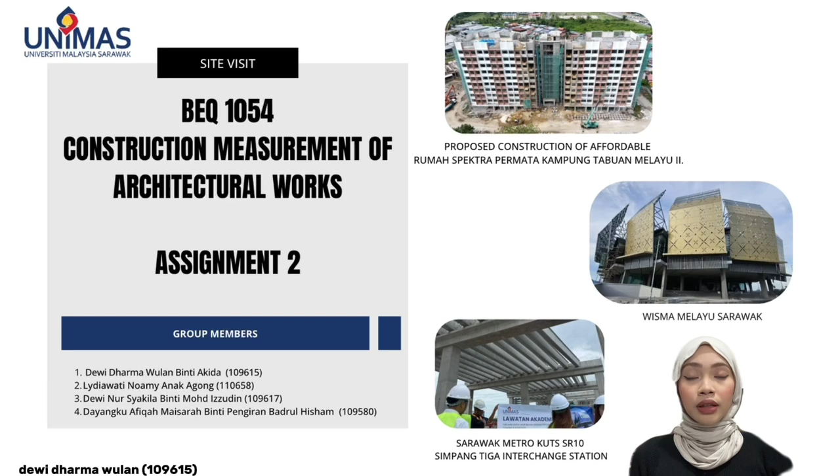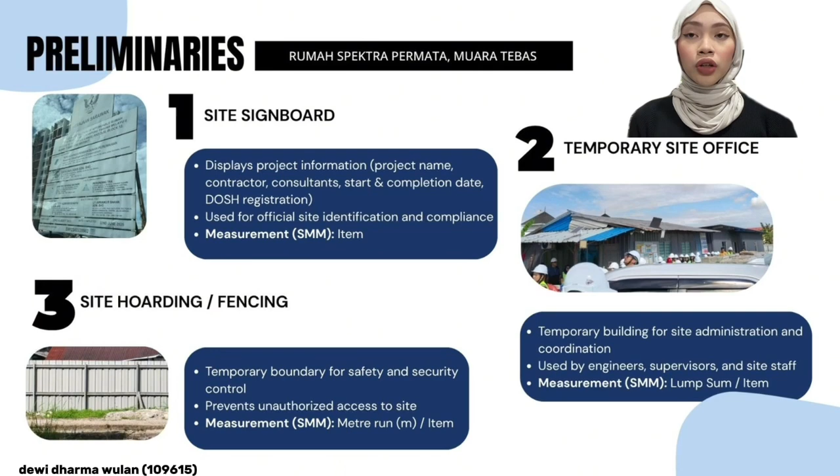To begin with, for preliminaries, we observed temporary works at the Rumah Spektra Permata site. First of all, the site signboard is measured as an item because it is a complete installation. Furthermore, the temporary site office is measured as a lump sum as it includes provision, installation, and maintenance throughout the project duration. Besides that, site hoarding made of zinc fencing is measured in meter run along the boundary. Next, scaffolding is measured in square meters or as an item, depending on its specifications. Lastly, the debris chute is measured as an item as it is a complete waste disposal system.

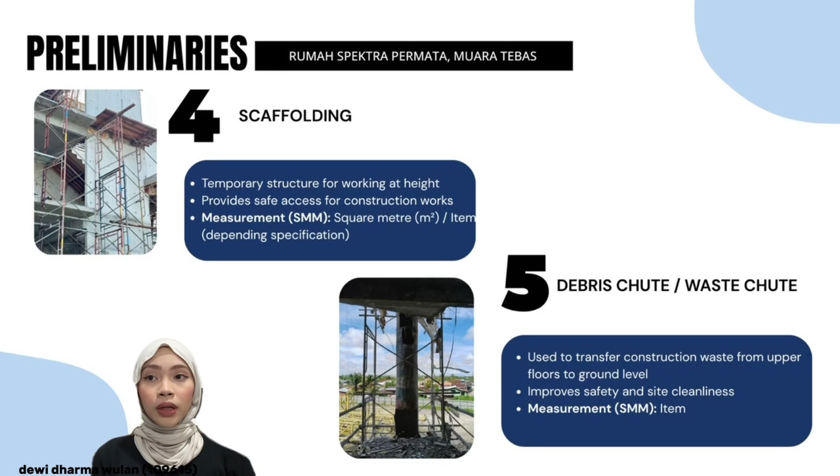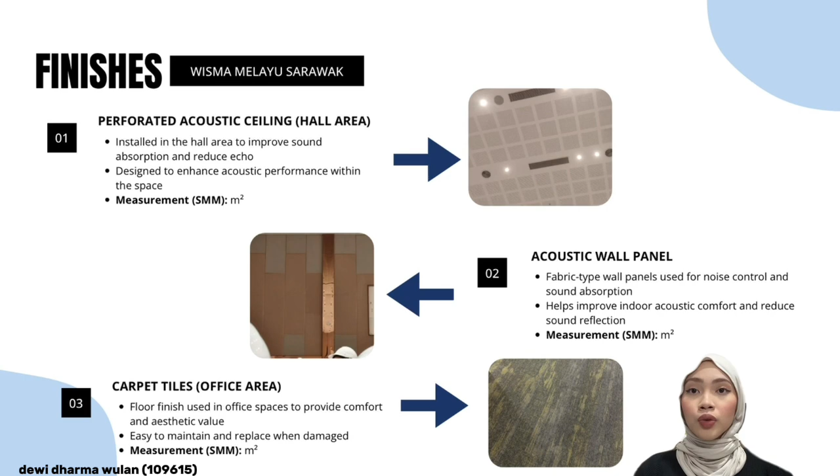Moving to the finishes, we observed several elements at Wisma Melayu Sarawak. Firstly, a perforated acoustic ceiling was installed in the hall area for sound absorption and acoustic improvement. Furthermore, acoustic wall panels made of fabric material were used for noise control and sound absorption, and they are measured in square meters. Besides that, carpet tiles were used as floor finishes in the office area and are measured in square meters. In addition, marble-look porcelain tiles were installed at the entrance for aesthetic and durability purposes and are also measured in square meters.

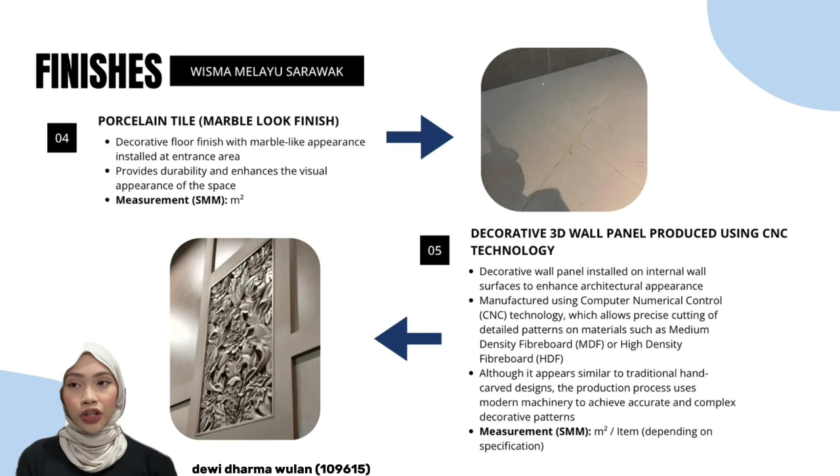Lastly, decorative 3D wall panels using CNC technology were installed on walls and are measured in square meters or as an item depending on specifications. These finishes clearly show the use of different materials for both functional and aesthetic purposes in building design. Thank you.

About types of fittings in mechanical and electrical. The first photo is a linear slot diffuser, which is an air distribution fitting used in HVAC systems, installed at ceiling level to supply conditioned air evenly. It provides uniform airflow and thermal comfort and is measured in meters. Next is the square ceiling diffuser, which is a typical four-way diffuser for uniform air distribution, installed on suspended ceiling systems and commonly used in office and commercial buildings, and measured in number. The third one is a recessed LED downlight, which is a lighting fitting installed flush with the ceiling surface. It provides general illumination for interior spaces and is suitable for offices, corridors, and commercial areas, measured in number.

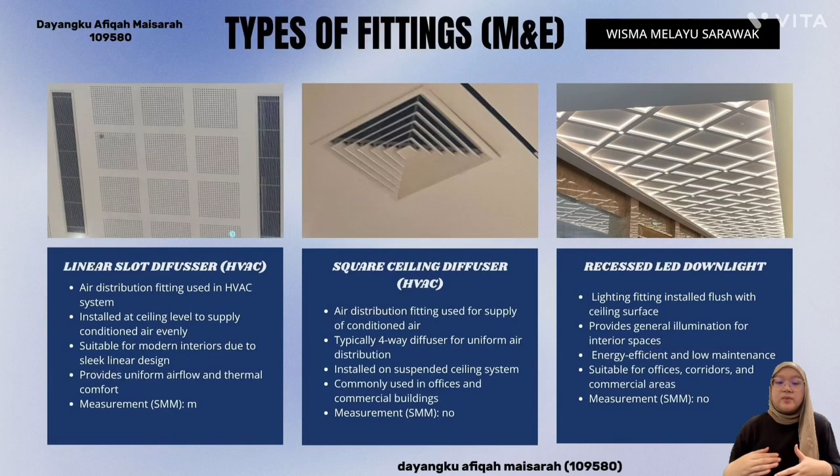Next is a round diffuser, which is a circular air outlet used in HVAC systems. It distributes conditioned air evenly in all directions, installed on the ceiling for effective air circulation and common in commercial and institutional buildings. It is measured by number. The last photo is electrical conduit, which is protective piping used to house electrical wiring. It is installed concealed within the ceiling or wall. The electrical conduit helps protect cables from damage and improves safety. It is measured in meters.

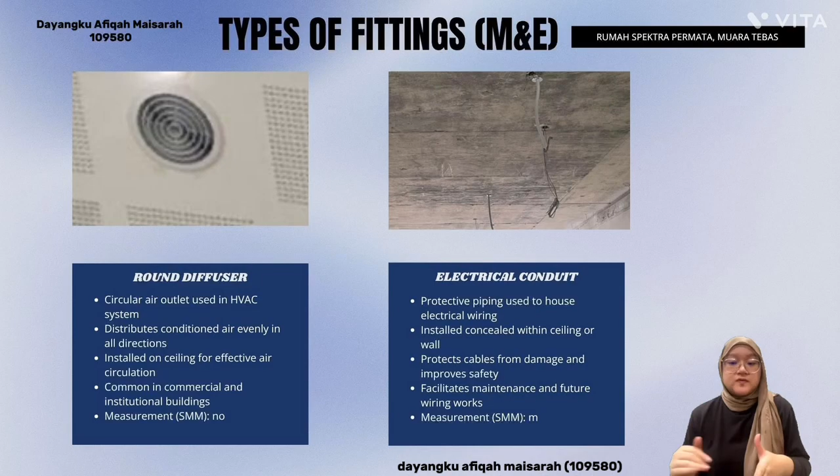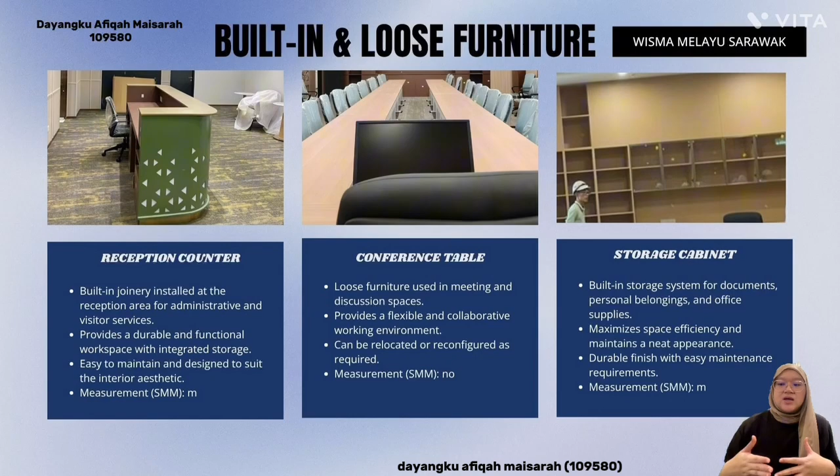Now I'll talk about built-in and loose furniture at Wisma Melayu Sarawak. The first photo is a reception counter, which is built-in joinery installed at the reception area for administrative and visitor service. It is easy to maintain, designed to suit the interior aesthetic, and measured in meters. Second is the conference table, which is loose furniture used in meeting and discussion spaces, which provides a flexible and collaborative working environment, can be relocated and reconfigured as required, and is measured in number. The third photo is a storage cabinet, which is a built-in storage system for documents, personal belongings, and office supplies, which maximizes space efficiency and maintains a neat appearance. It has a durable finish with easy maintenance requirements, measured in meters.

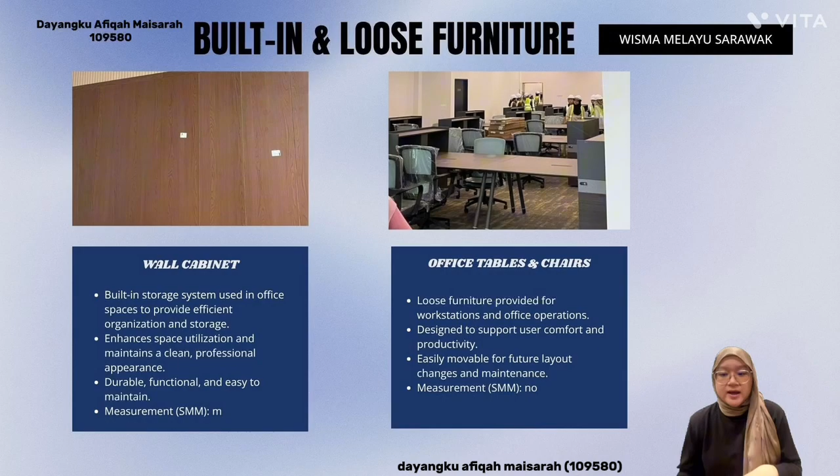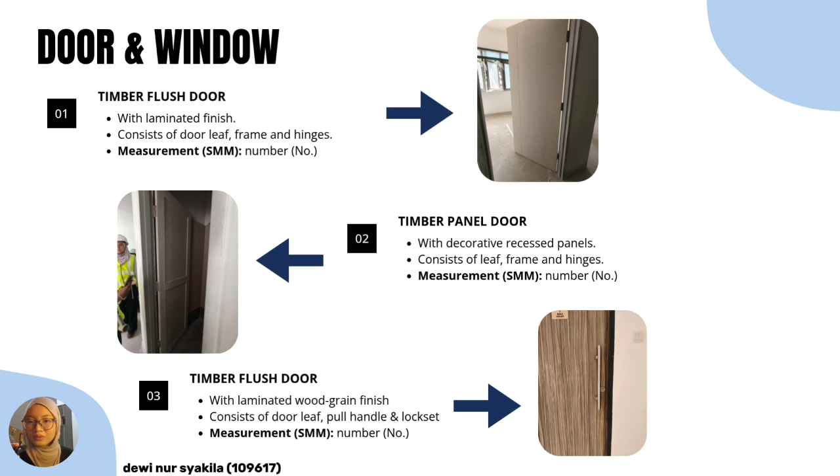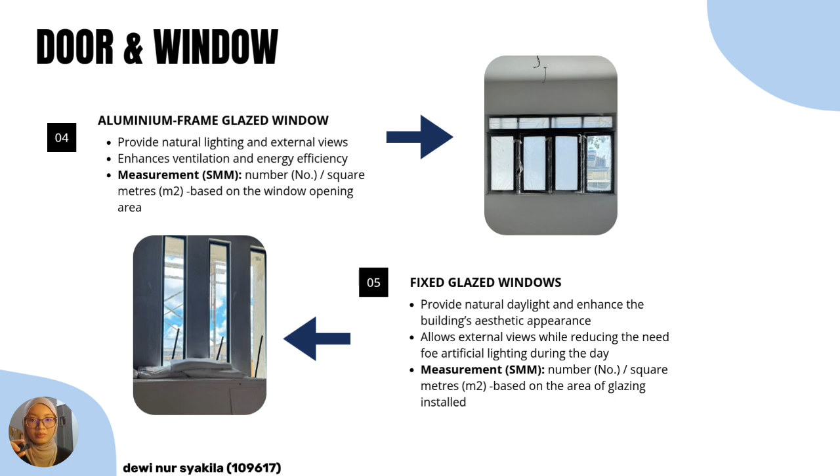Next are the windows. The first is an aluminium frame glazed window, which provides natural lighting and ventilation. Aluminium is durable and requires low maintenance. The second is a fixed glazed window, which allows daylight and external views while improving the building's appearance. According to SMM2 and SMM3, both types of windows are measured in square meters.

For wall elements, the first type is a reinforced concrete wall, which is constructed using cast in situ concrete. It acts as a structural wall that provides strength and stability to the building. The second type is an autoclaved aerated concrete, or AAC block wall. AAC blocks are lightweight, provide good thermal insulation, and are commonly used for non-load-bearing walls. The third type is a concrete ventilation block wall, also known as a breeze block wall. It allows natural ventilation and daylight while maintaining privacy.

According to SMM2 and SMM3, breeze block walls and AAC block walls are measured in square meters, while reinforced concrete walls are measured in cubic meters.

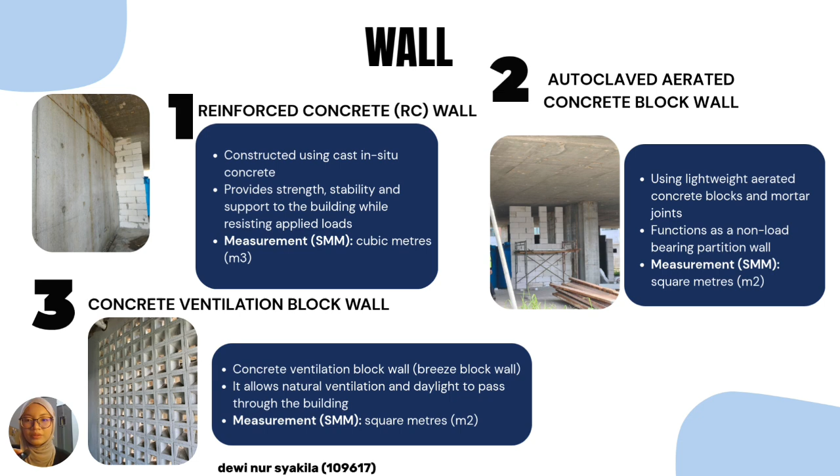Next is an operable acoustic partition wall. It consists of movable panels that can be folded and stored when larger open spaces are needed. This system helps divide a hall into smaller rooms for meetings, seminars, and events.

The final wall type is a ventilation block wall with decorative patterns. It improves natural ventilation, daylight, and the overall appearance of the building. According to SMM2 and SMM3, both types of walls are measured in square meters.

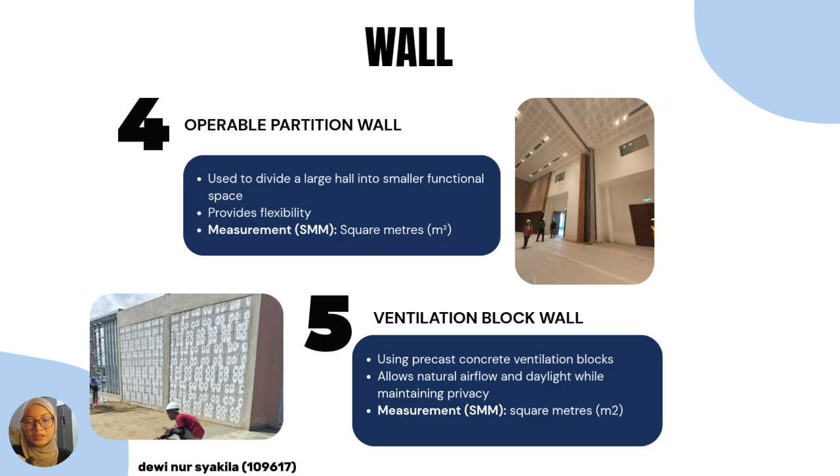The first sanitary fitting observed was the water closet installation point. From the observation, we saw the exposed pipe outlet prepared before the toilet bowl installation. The pipe condition is important because it connects the sanitary appliance to the sewerage system. According to SMM2 and SMM3, sanitary fittings such as water closets are generally measured by number or unit.

The second sanitary fitting observed was the floor trap located at the bathroom floor area. The floor trap functions to collect wastewater and direct it into the drainage system while preventing foul odor from entering the room. We also observed that the floor was properly sloped toward the trap to ensure efficient drainage. In measurement work, floor traps are measured by number according to the type and size specification.

The third sanitary fitting observed was the ceramic water closet or toilet bowl. This toilet bowl was still wrapped with protective plastic before installation to prevent damage. The water closet is an essential sanitary appliance for waste disposal in residential buildings. Based on SMM measurement rules, water closets are measured per unit, including fittings and accessories where specified.

The fourth sanitary fitting observed was the bidet spray and toilet accessory. These fittings are installed beside the toilet bowl for cleaning purposes and user convenience. Proper water supply condition is important to avoid leakage during operation. In SMM practice, these fittings are also measured by number according to the type and specification.

The fifth sanitary fitting observed was the shower area installation. The shower area includes the water outlet connection, drainage system, tile wall finishes, and waterproof floor area. We learned that proper waterproofing and pipe coordination are important before installing the final shower fitting. Shower fittings are normally measured by number, while wall and floor finishes are measured in square meters according to SMM2 and SMM3.